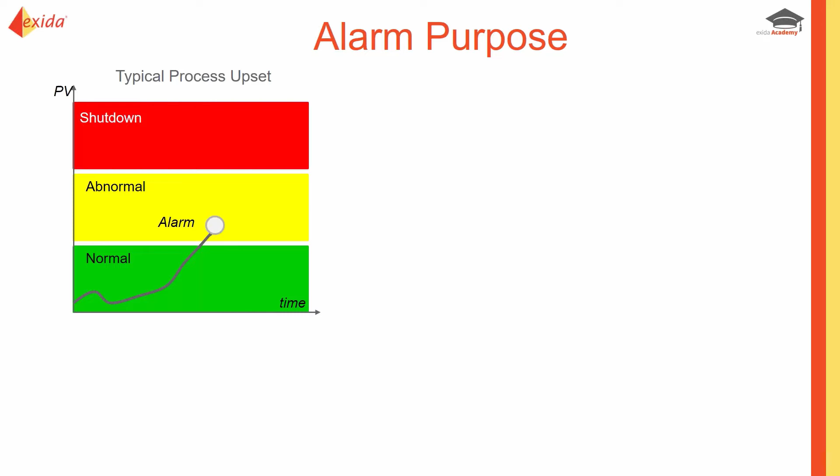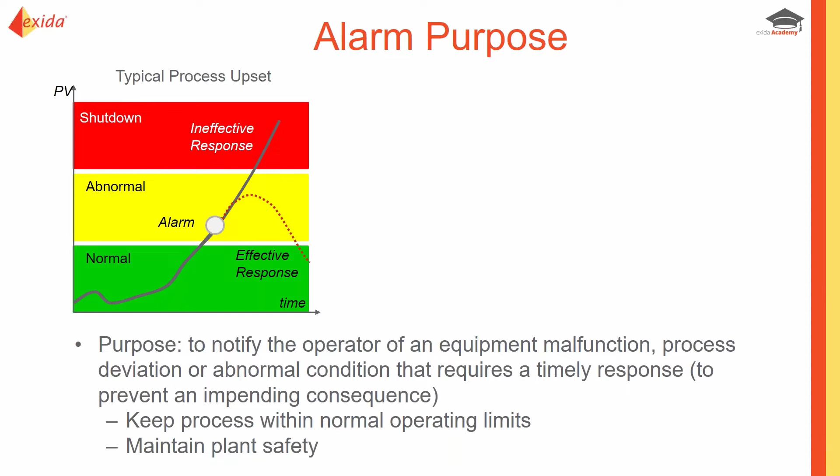So let's start with a reminder of what an alarm is supposed to be. In general, the DCS is typically able to control your process and keep it in the green zone, the normal operating zone, and that's what you want most of the time. However, when an excursion occurs and you go outside that realm into the abnormal situation area, that's when you want an alarm, a notification to the operator that something has happened requiring their attention and response. If the operator takes the appropriate response within the appropriate amount of time, the abnormal situation should correct and the alarm should clear. If the operator doesn't respond in time, the process will continue to escalate and deviate until we end up with a consequence or a shutdown.

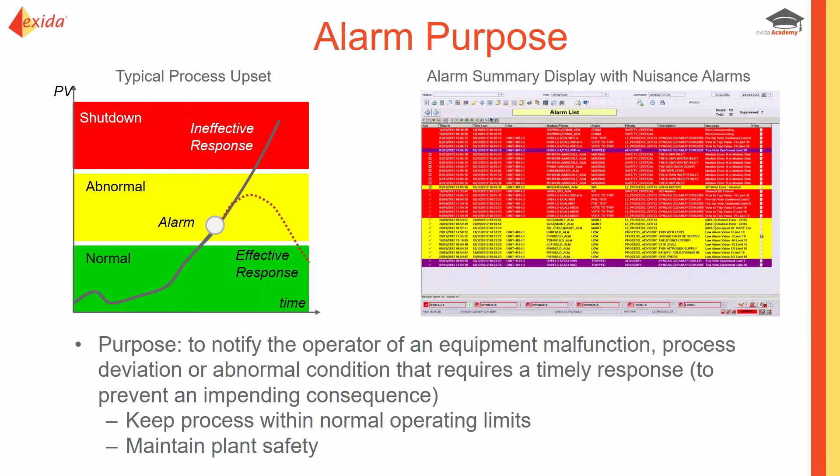So pretty straightforward on what an alarm is supposed to be used for. If you walk into a control room and see that the alarm summary display is full of alarms, then there's something wrong. That means the alarms we see are not following the principles we just talked about. In many cases, what we'll see is stale alarms, alarms that have been on the console for long periods of time. How can that be? Either no consequence has occurred, or the operator has responded and the alarm is not cleared. So it's an example of where the alarm as implemented is not following its purpose. It's very common to go into a control room and see nuisance alarms.

So first we want to talk a little bit more about nuisance alarms, because that's essentially the main reason for shelving to be used, is to be able to deal with alarms that are not functioning temporarily. A nuisance alarm by definition is an alarm that annunciates excessively, unnecessarily, or does not return to normal even after the operator takes the correct response.

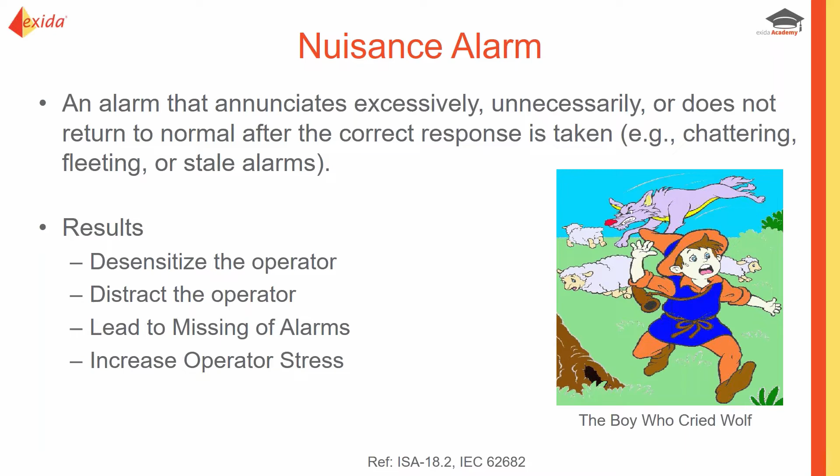That foreshadows the human factors point of view of nuisance alarms. If you implement a new alarm and train the operator on what they're supposed to do, the first time it occurs, it's likely the operator will respond appropriately. But if the alarm doesn't clear and remains on the console and no consequence occurs, that would be very confusing to the operator. The second time, they'll probably still respond as they're supposed to, but at some point they're going to stop responding because it's not making a difference. They probably feel their time and attention is better spent on other things, and that would seem correct if nothing happens after they respond appropriately. So we can see here the impact of having nuisance alarms.

Now there are a couple of different nuisance alarm types, different categories, and we want to go through them because that's relevant when we talk about shelving. The first type is called a chattering alarm.

This is an alarm that goes in and out with a high frequency and is only an alarm for a short period of time. You could find alarms that go in for 1 second and then clear, and a little bit later it's 2 seconds and then clears, almost not even enough time for the operator to acknowledge it. So obviously the alarm isn't clearing because of action the operator is taking, since they probably don't even have time to respond. That can be quite annoying, and if you have chattering alarms, chances are the alarm horn in your control room is turned off because it would drive the operators crazy.

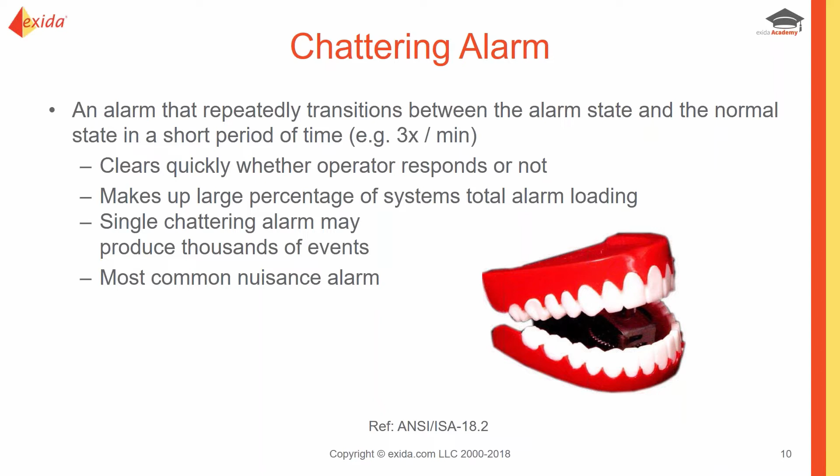Another type of nuisance alarm is a fleeting alarm, which is very similar to a chattering alarm, except it just does not repeat immediately. Another category of nuisance alarms is what we call bad actors.

These are the alarms that create the majority of the notifications in your system. You may have a control system with 10,000 alarms configured, but there are likely 10 to 20 of them that create 50 to 80% of all the notifications. That can be a tremendous annoyance factor to the operator, and those could be chattering alarms that result in bad actors, but it can also come from problems with hardware, failures, and things like that.

And that's one of the key things I want you to realize with nuisance alarms: it's not only a design problem where the alarm wasn't designed appropriately to begin with, but it could happen just from equipment failing, or being in the process of failing, where you end up with nuisance alarms.

And then the last category is called stale alarms. These are the alarms that are constantly displayed on the alarm summary display. So when you walk in the control room, if there's the same cast of characters of alarms that have been on the summary display for days, weeks, or months, or maybe even years in some cases, those are stale alarms.

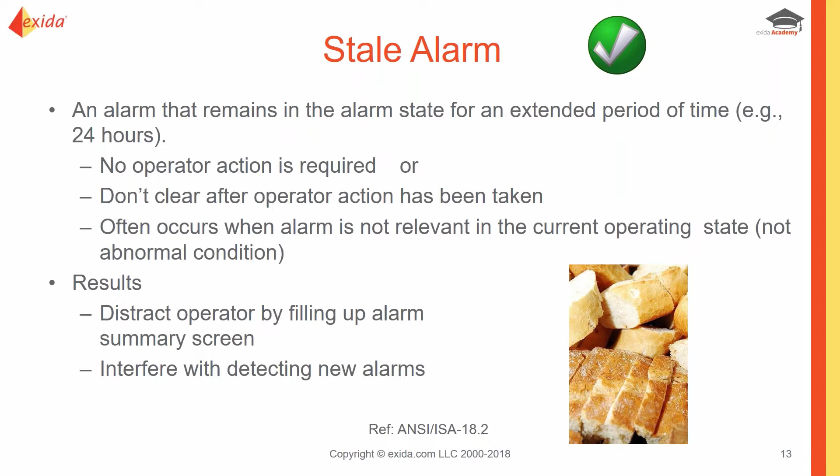Doesn't matter what the operator does, no matter what response they take, the alarm doesn't go away. So there's something wrong with that situation, and that can clog up the alarm summary display, making it hard for them to notice new alarms and process alarms during an upset. So it's very important to try to get rid of stale alarms as well.

So one of the downsides to nuisance alarms, let's talk about how that impacts the operator from a human factors point of view. The first way we'll look at it is from what's called situation awareness, which is the ability for the operator to take in what's going on right now and understand what that means in terms of how the process is working, where it's headed, and what will likely happen in the future related to the inputs they see at that point in time.

So they use their knowledge, their understanding of the process, the way things work together and interact. We'll call that the mental model, and they use that to really project out and understand what's happening.

Well, you can imagine if the cues that they are using to start that understanding process are suspect, false, or unreliable, that's really going to jeopardize their ability to truly understand what's going on with the process. It can lead them to incorrect conclusions, to a misunderstanding of how the process works and what different information and inputs mean, and it can lead to mistakes.

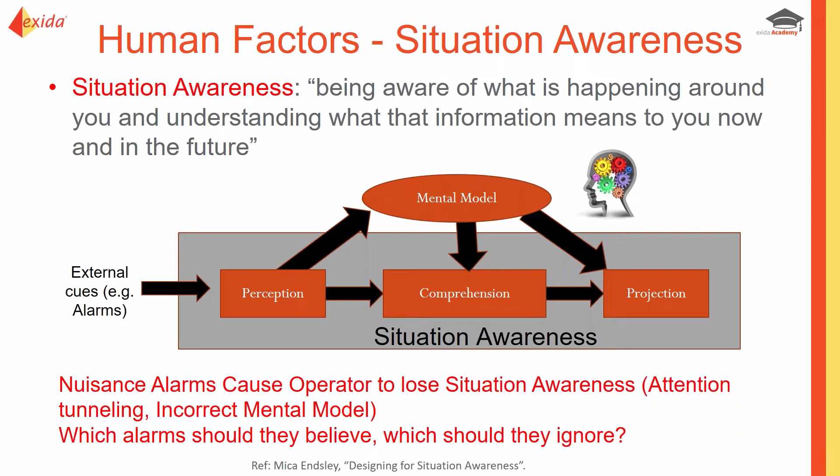It can lead to operators performing the wrong action because they were misled by spurious information. So nuisance alarms really can impact the operator greatly in terms of their understanding of what's happening in the process.

Now, what tends to happen if you have a lot of nuisance alarms is the operators develop this philosophy or understanding that they think it's okay to ignore alarms. And one might think, well, that's bad, that's dangerous. And of course, that is.

And ideally, we would not want operators to ignore nuisance alarms. But from a human behavior and human factors point of view, we need to understand what's happening. And what is happening is you have a person whose role is to take in hundreds of pieces of information and data and make quick decisions about what's happening and what they need to do. So they have a lot of information to process.

What a nuisance alarm represents to them is a piece of data that they do not have to worry about because they've seen in the past that it has not made a difference. So they ignore it so that they can focus on other areas that they believe are more important.

And actually, from an operations point of view, this would be exactly what you would want an operator to do, to focus on where their attention is really needed and where it makes a difference. And nuisance alarms are causing them to think that they don't need to worry about certain alarms. So really the only way to change this is to eliminate the nuisance alarms.

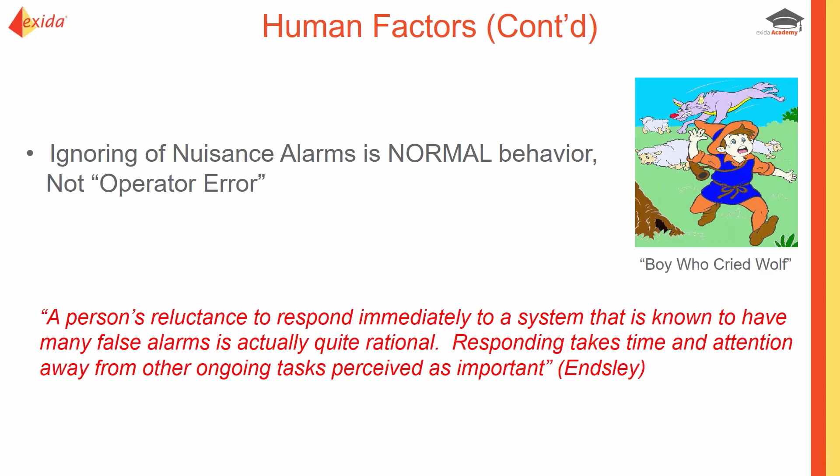Part of the process is to be able to remove the nuisance alarms temporarily from the operator's view, and that's the process called alarm shelving, which we'll get to in a second.

Now, again, thinking about the impact of nuisance alarms, if we want alarms to help us maintain plant safety and to act as an early layer of protection or a safeguard, then we are counting on the operator to reliably respond to alarms, or a particular alarm, when it occurs.

Well, this is pretty inconsistent with nuisance alarms when operators are not responding to alarms. So certainly, if the operator were to not respond to a safety alarm, the probability of failure is 100%. So if you've got operators not responding to alarms, you are jeopardizing the reliability of that layer of protection.

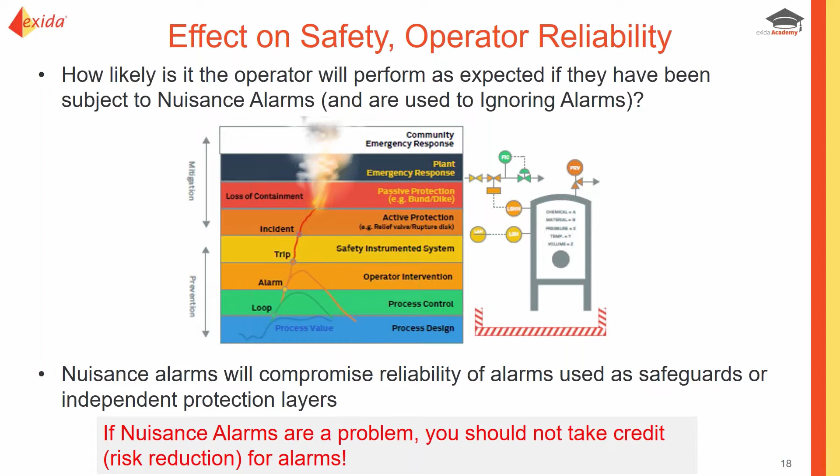And in general, we would recommend that you should not take credit for alarms if you have issues with nuisance alarms. So you should not take credit for alarms as safeguards or as independent protection layers. So that's the impact from a human factors and performance point of view.

So now let's talk about how we change things or deal with that. And that comes out of the international standards for alarm management, ISA 18.2 in the US and IEC 62682 internationally, defining what an alarm is supposed to be.

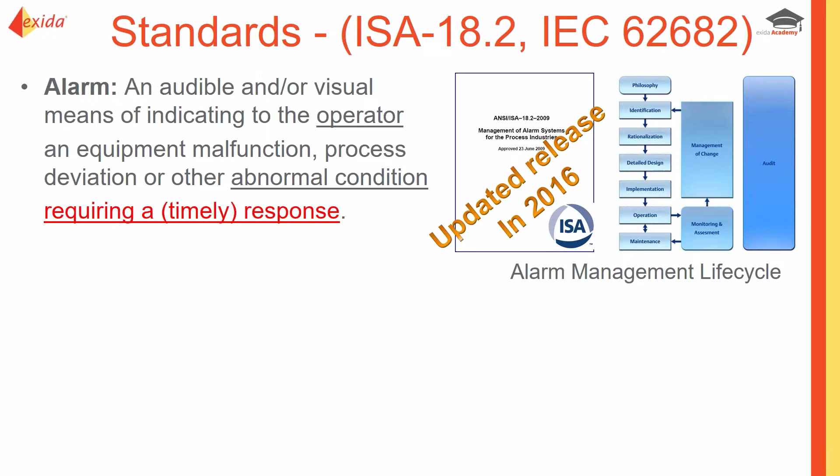But of course, that process does not happen immediately, and it doesn't happen necessarily right when the nuisance alarm occurs. So what we want to talk about is that intermediate process of what we can provide to the operator to help manage the nuisance alarm situation until it can be fixed.

Now, the standards also push and promote that nuisance alarms need to be taken care of very aggressively and addressed, defining some key performance indicators.

And of course, these KPIs are meant to drive behavior to improve the alarm system, eliminate nuisance alarms, and make the system more reliable. That's the whole idea of these KPIs.

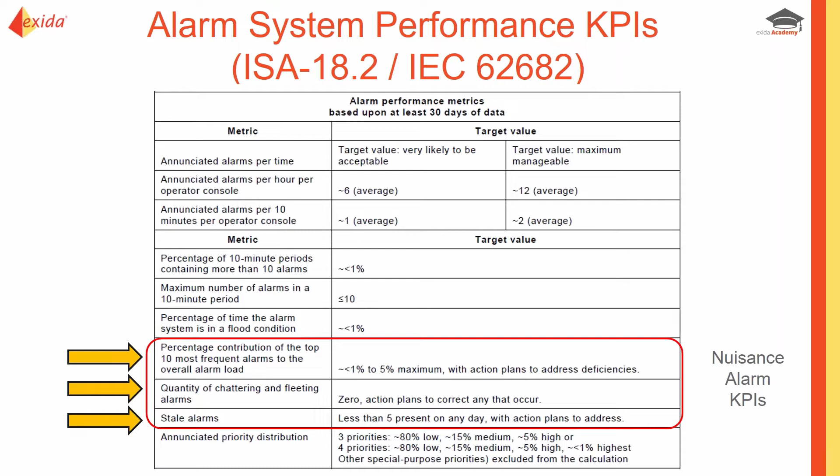The other thing the standards document talks about is a concept called suppression. This is where we get into, okay, when we get a nuisance alarm, what do we do? What can the operator do? There's a process downstream to investigate the problem, to determine whether it's a design problem, a hardware problem, or some kind of failure. But in the immediate time frame, we want to alleviate the operator's distress from the nuisance alarm and remove it from view. So that's where suppression comes in. The standards define three different forms of suppression, which is essentially hiding the alarm from the operator when the base alarm condition is present.

The first type of suppression is called designed suppression. That's where the control system does the automatic determination of whether an alarm should be presented or not, based on the status of the process, the state of certain equipment, or what recipe is running. So it knows all that, and then in a smart alarming way will suppress alarms if they're not relevant.

The second type of suppression is shelving, and that's the focus of this webinar. That is meant for operators to temporarily suppress an alarm, to remove it from their view, to go onto what's called an alarm shelf. So it's kind of like a snooze button for an operator.

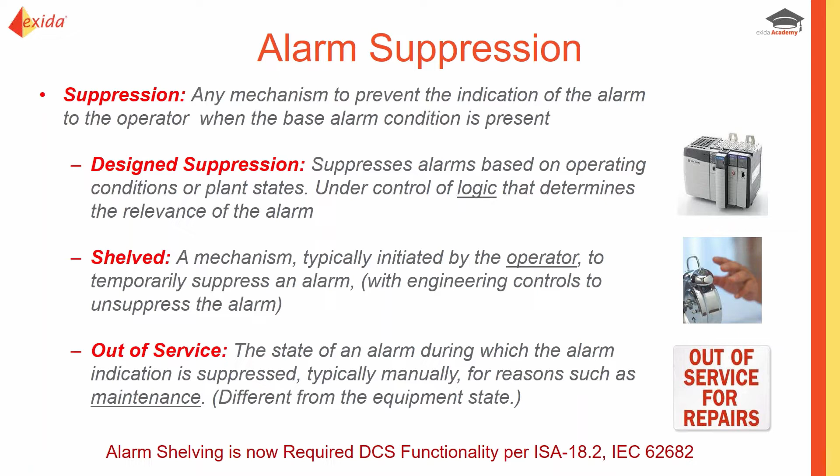So more about shelving in particular. The idea is, when a nuisance alarm appears and the operator knows at that point in time that the alarm is not valid or is only interrupting or distracting them, and they determine there's not a critical situation, then they can shelve or suppress the alarm, and that removes it from their view temporarily for a fixed period of time and puts it in a separate list of alarms. Now, this is different from disabling the alarm. If you disable the alarm, it's essentially gone forever unless you remember to re-enable it.

There are no lists of disabled alarm statuses really in a control system. You have many alarms that would be disabled just because there are so many alarms provided. So to be able to show a list of which of the potential alarms in the system are actually disabled would be a gigantic list, and it would be difficult to know which ones are newly disabled that shouldn't be, and which ones are disabled and were meant to be.

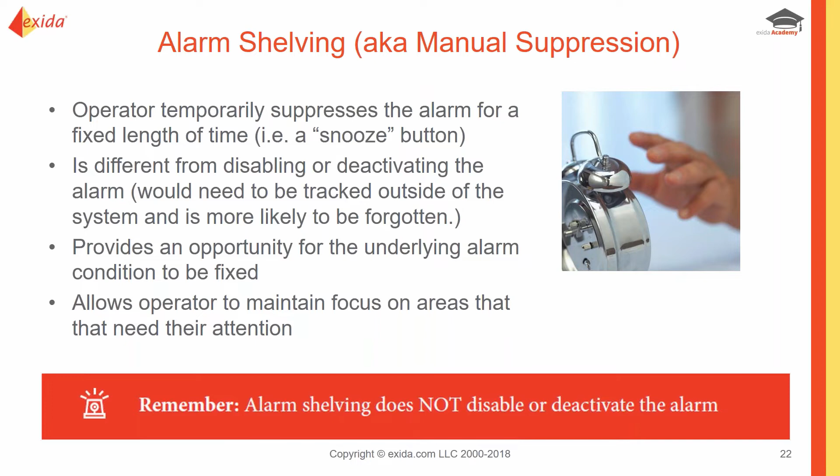So one of the key features of shelving is that the alarm, although it's out of the operator's view, that's only temporary, and the fact that it's shelved is displayed on a shelved alarm list. So it's gone but not forgotten, and it will come back after that period of time is up. And of course, the whole purpose of shelving is, let's get this nuisance alarm out of the operator's view so they don't have to deal with it and get frustrated and used to needing to ignore alarms. Remove it from their view so that then the resolution process can take place. The underlying condition, whether it's a design problem, a hardware problem, or a failure of some sort, can be addressed.

And that then allows the operator to maintain their focus on true problems and true areas that need their attention. Now, there are two different types of alarm shelving, and each type handles different types of nuisance alarms better, or is optimum for certain types of nuisance alarms. Now, some control systems provide both types of shelving, others provide just one. And if they provide just one, it's typically the continuous shelving.

So continuous shelving means once the alarm is shelved for a certain period of time, even if the alarm clears during that period of time, and if it comes back into alarm, it would immediately and automatically go back on the shelved list.

So there will be no action on the operator's part needed to reshelve the alarm. This is really good for chattering alarms, alarms that may go into alarm for a couple of seconds, because if the operator had to reshelve every single time the chattering alarm came in, that would be pretty pointless. So continuous shelving essentially suppresses the alarm for a fixed period of time, and it stays there whether the alarm is active or not during that time frame.

Now, the other type of shelving is called one-shot shelving. In this case, there's still a time estimate or time range for the alarm to be shelved, but if the alarm clears before that time elapses, then we rearm the alarm and put it back into the active array so it can be available if the situation triggers again. So if the alarm were to clear and then come back into alarm, it would actually be presented to the operator, and in this case it might be valid - that's part of why you might use this different type of shelving.

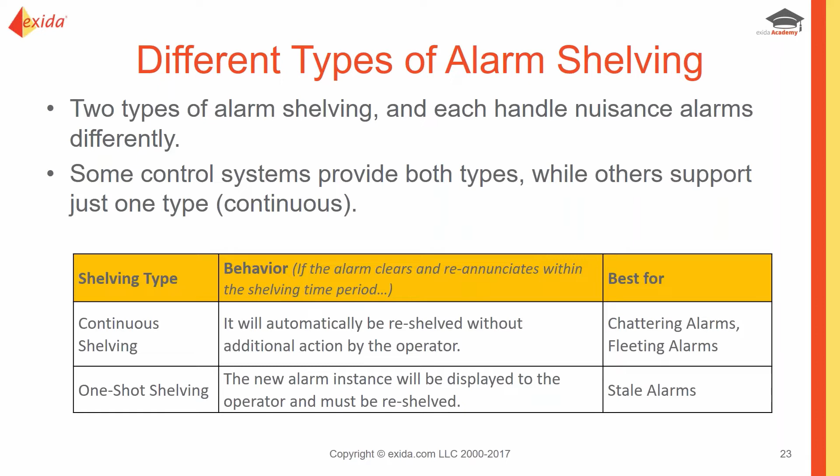So those are two different types of behavior related to what happens when the alarm clears and gets re-annunciated during the shelving period. So maybe you're thinking, okay, I'm interested in using shelving. I don't yet know what features are provided by the control system, but what are the things I need to talk about or figure out to make shelving work in my plant?

Alarm shelving is something you need to talk about in your alarm philosophy. That's new content as well, to make sure you're talking about how you're going to use shelving. It doesn't necessarily mean you must use shelving, but you must talk about the shelving capability now provided by the control system providers or suppliers. How are you going to take advantage of it, or how are you going to use that in your plant? You need to document that in your philosophy.

So what are the things to consider? One might want to look at what alarms can be shelved - that's the first thing to think about. Maybe not all alarms should be shelvable. Maybe the alarms that are the highest priority, or of a classification like safety alarm or safety critical, maybe those alarms shouldn't be able to be shelved. So you go through that thought process of which alarms can be shelved, and which can't.

Who can they be shelved by? Can an operator do it, or does it require a supervisor? Does it require some authorization? And how long should the alarms be able to be shelved for - an hour, a shift, a couple of days? Those are the kind of things to think about and define as part of your shelving process.

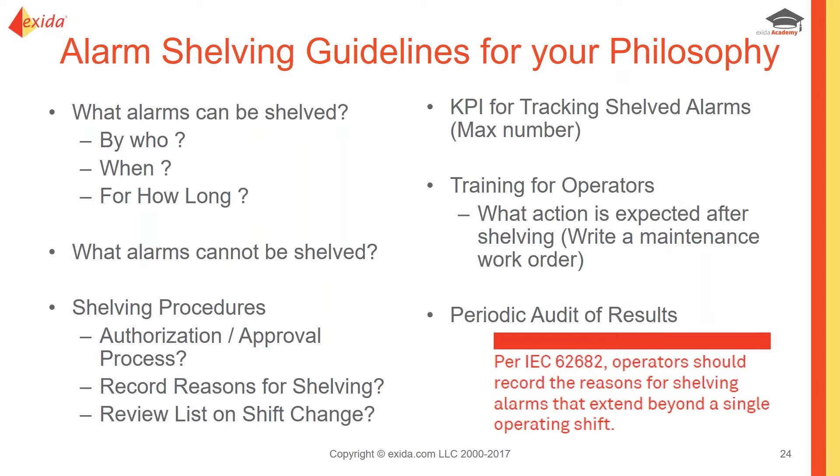So these are just some of the things you might want to think about to tailor shelving capability to your operation, and there's even more in the ebook. So those are ideas for what to include in your philosophy.

When it comes to being able to use shelving successfully, here are 5 best practices and recommendations. First, and probably the most important thing, is to train the operators on what the purpose of shelving is for. It's for helping to remove nuisance alarms from view. It's not a substitute for acknowledging alarms, and it's not a way to just quiet the alarm horn. There is a purpose for it, and if shelving is not used appropriately, you could have problems - you could have situations occur.

So it's a tool that can help the operator, but they need to use it appropriately.

Second, they should always be able to quickly and easily access the list of alarms that are shelved, so they can see which alarms are suppressed. They might want to look at that before they start up a new process area or piece of equipment, to make sure if something's been idle for a while there are no suppressed alarms on that equipment before they start it up.

So there are many good reasons why shelved alarm information should be readily accessible for the operator, and they should be reviewing it on a regular basis. In fact, that should be part of your shift handover process, where the operator on shift talks about what alarms are shelved or suppressed to the new operator coming on, and why they've been suppressed, as part of the handover.

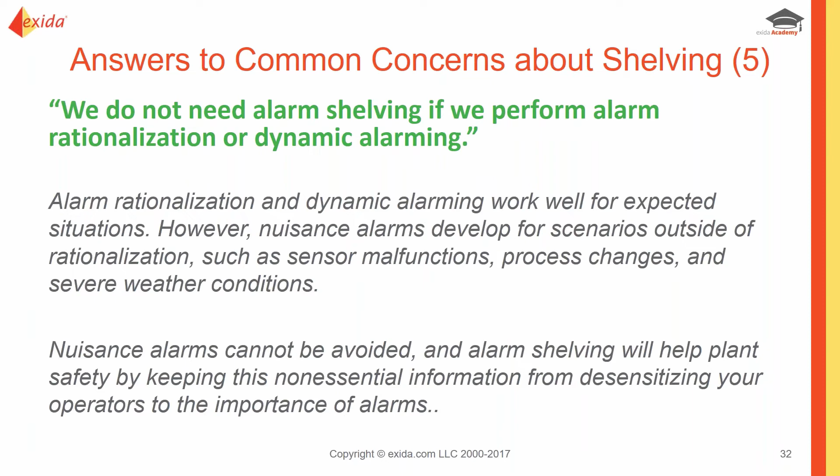So it's impossible to design to eliminate all nuisance alarms. You can certainly minimize the potential for nuisance alarms and minimize the number of alarms you get by doing a thorough and proper rationalization, and that's what you should do. But there will still be nuisance alarms that occur, and that's where alarm shelving still would be required or beneficial.

So now let's switch gears and talk about what the control systems are supposed to provide for alarm shelving. What are the requirements in the ISA and IEC standards when it comes to alarm shelving? First, from an overall point of view, as I mentioned earlier, the function or ability to shelve alarms is a required function from these standards.

In addition, there needs to be a way to display the list of alarms that are shelved, and provide some time limit or timeout for the alarms to only be shelved temporarily. There should also be records for when alarms are shelved, and as a best practice or recommendation, the control system should have some methodology so that when a bunch of alarms are unshelved or unsuppressed, that doesn't result in a flood of alarms. So those are some of the key requirements for overall alarm shelving functionality.

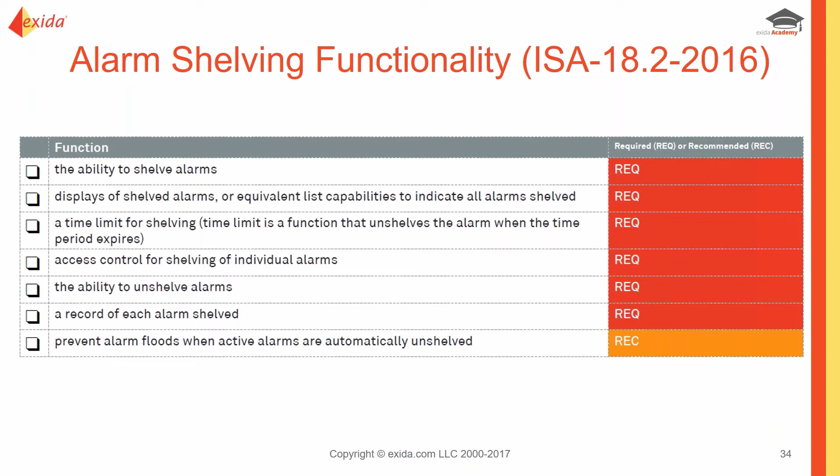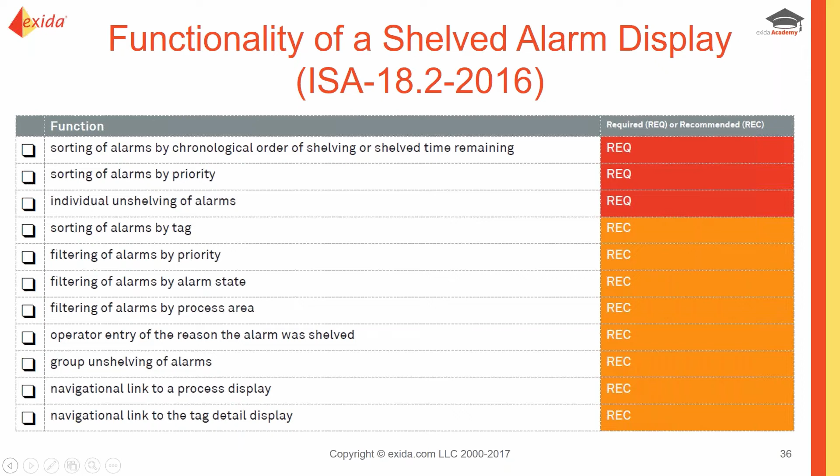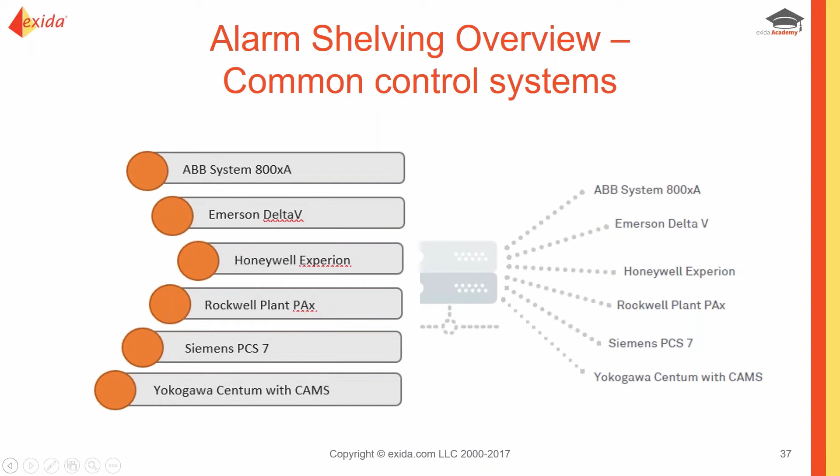So now let's talk about, at a higher level, what is the alarm shelving implementation in some common control systems. And for this, we've looked at 6 different control systems that we've had the pleasure of doing various projects on. So we've developed a good expertise as to how they work and recommend to people on how they should leverage alarm shelving for these different platforms.

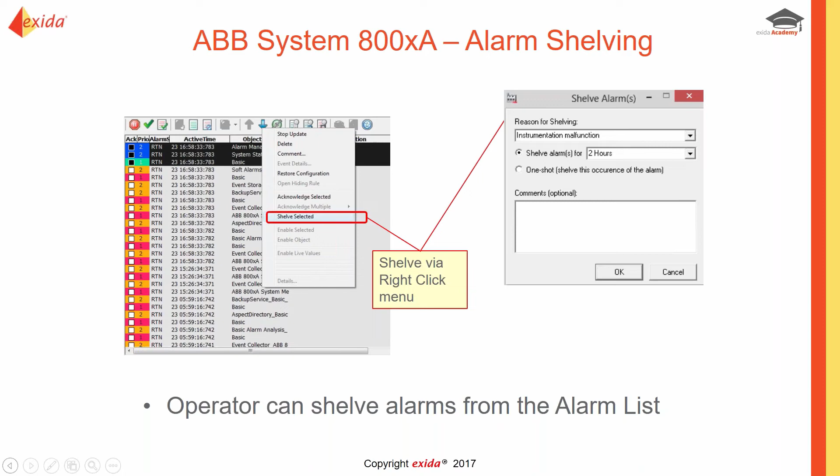So the first one is ABB System 800XA. And for their implementation, shelved alarms or alarms can be shelved from the standard alarm summary display via right click, and that will call up a dialog box from which the operator has several choices related to shelving. The first thing is they get to choose what is the reason for shelving the alarm, and that choice comes from a predefined list that is set up in engineering mode. So they can choose the predefined reason.

That's the first step. The second step is to determine how long they want the alarm to be shelved for. And in this case, again, it's a predefined list of times to choose from. That could be either fixed duration or actually could be infinity, meaning there is no time limit. So the operator has the ability then to set the time they want the alarm to be suppressed for.

And then they also have a choice of whether they want that particular alarm to be shelved using a continuous shelving or one-shot shelving. And as we talked about, each of those has kind of a different ideal application. Continuous shelving for chattering alarms and most alarms in general, and one-shot shelving for stale alarms. So depending upon what's happening, the operator can choose the time duration and the type of shelving.

They can also enter a comment, a free-form comment, so that can be built into the dialogue to kind of force them to do that. And that's available for them to add additional information as to why they've shelved the alarm.

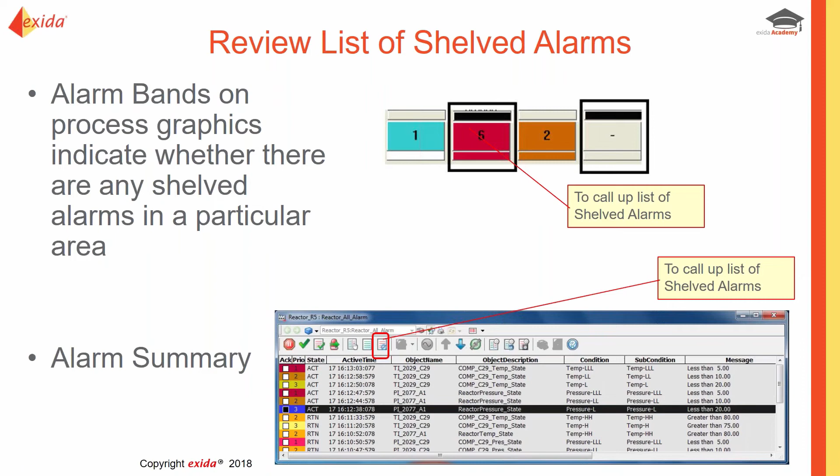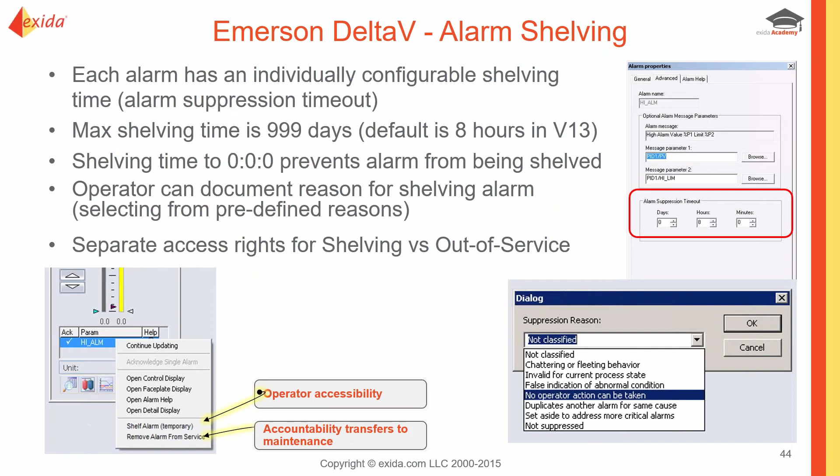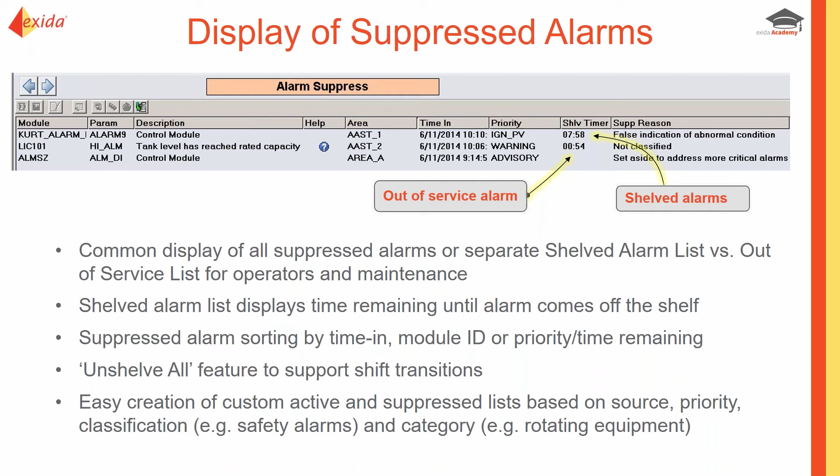This has the flexibility to configure so that you have separate displays for shelved alarms versus out of service, if that's a better way to view things. And then you can even go further with shelved alarm lists based on certain categories of alarms - either the highest priority alarms, or maybe alarms of a certain classification, like safety alarms or environmentally critical alarms. You could set up a display that shows any alarms with that classification that are shelved, because that would be very important to know - if a safety alarm is being shelved, then it's essentially like you're bypassing a safety function almost. So a lot of capabilities there.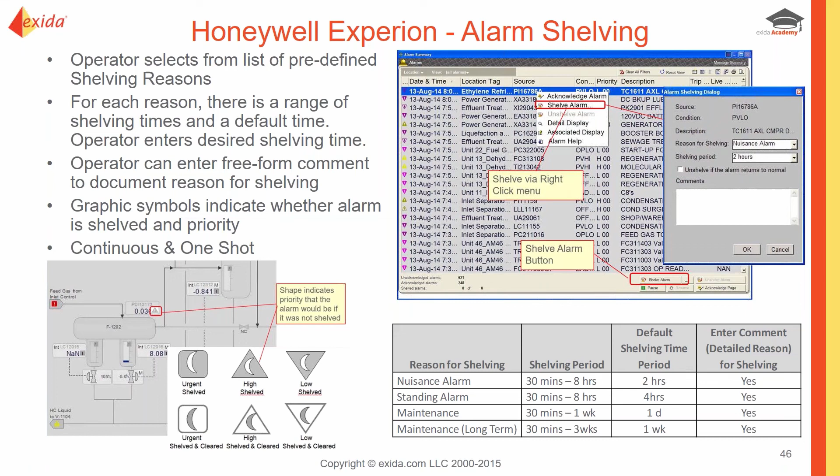One of the strengths of this system is the ability to display within the process graphics the status of shelved alarms. So if you look at a process screen, instead of showing an active alarm being colored, you'll see a symbol that tells you there is a shelved alarm present for that tag. It also helps differentiate what the priority of that alarm would be. So you can look at a screen and not only know what alarms are active, but also know that there are some alarms that are actually suppressed at that point in time.

For the Rockwell PlantPAx system, alarm shelving can be enabled or disabled on an alarm by alarm basis, so quite good control over what alarms can be shelved and which ones cannot. In addition to enabling or disabling, you can also set the maximum shelving time separately for each alarm. 8 hours is the default, but you could set that for 8 hours, 24 hours, whatever.

The idea is when the operator goes to suppress or shelve that alarm, they have the ability to set the shelving time anywhere they want between 0 and up to that maximum. They can also enter a free-form comment to document why they shelved the alarm. Similar to what we just talked about, a symbol on a process graphic, if an alarm is active and shelved, there'll be some indication of that status provided within the symbol.

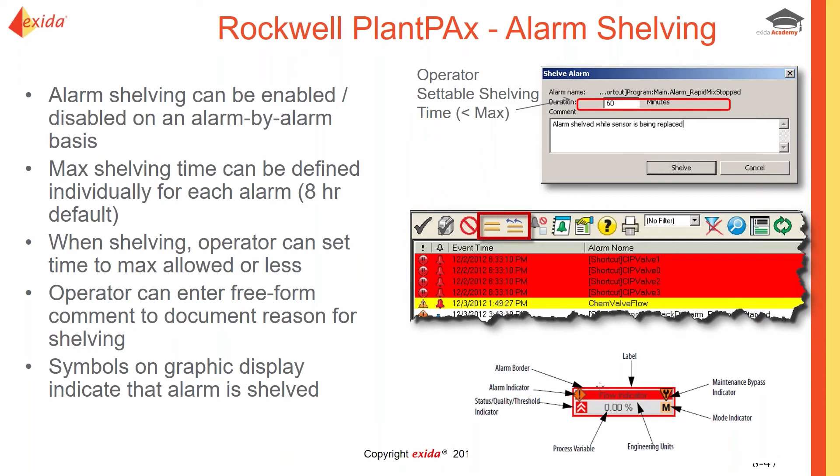Now, for the Siemens system, they have two different shelved alarm displays. One is of alarms that are shelved but not actually active at that point in time, so the alarm is not on, but it's suppressed. Those are called the list of messages to be hidden. Then there's a separate list, which is alarms that are active and are shelved, and that's the hidden messages list.

Again, it helps you to understand whether the alarm is actually active or not, and in that case, if you were to unshelve the alarm, what would happen? Would you now have an active alarm situation, or is the alarm actually cleared and it goes back to normal? Similar to the other systems we looked at, when an alarm is shelved in a PCS7 system, the operator can enter an optional comment.

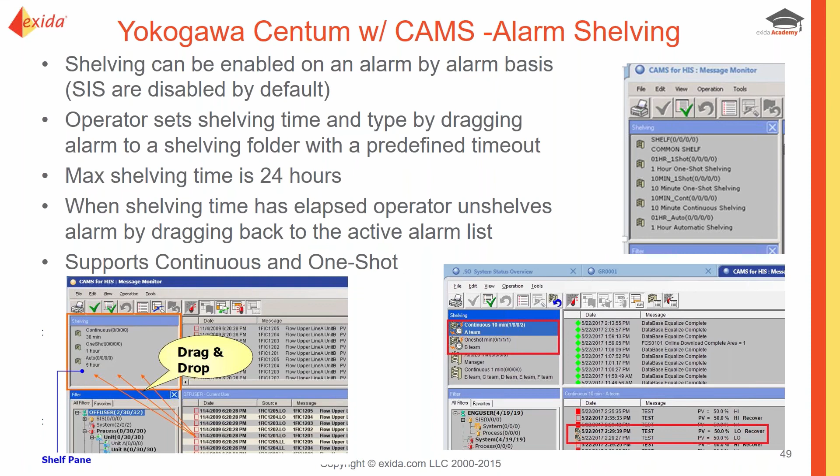When the alarm times out and it's time to be unshelved, there's visual indication provided, and then the operator needs to go and grab the alarm and essentially drag it back to the active alarm list to clear the suppressed alarm. So that's the overview of alarm shelving implementation. You can see there's a lot of good and very useful functionality to take advantage of. You can also see that all those suppliers implemented functionality a little bit differently.

So one of the recommendations is, before you create your philosophy to define how you want to do shelving, make sure you do some research to understand how your control system supports it, so that the requirements that you specify can be implemented in the control system.

In summary, I truly believe that alarm shelving is a very critical tool for the operator to help them deal temporarily with nuisance alarms. I'm not the only person that feels this way, because that's why the standards bodies put that as a required function. Certainly, if you don't use alarm shelving and you have nuisance alarms, then operators are going to become desensitized to alarms in general. That will increase stress tremendously.

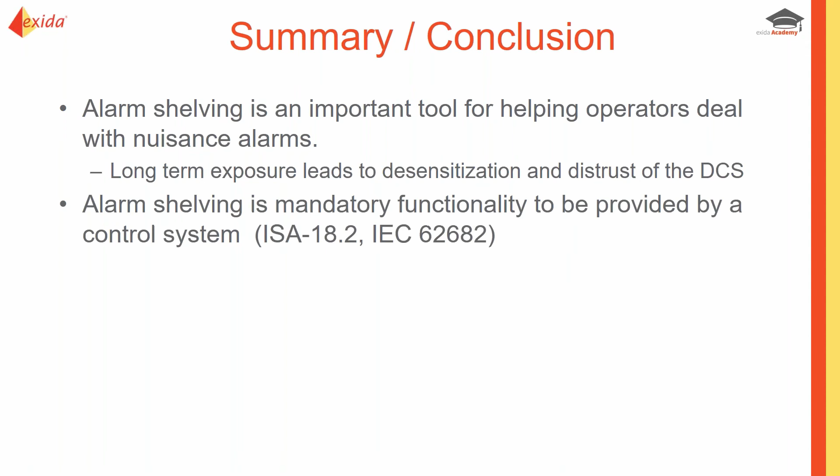It can cause them to distrust the control system. So using alarm shelving to alleviate the nuisance alarm problems temporarily until they can get fixed is a pretty powerful functionality. As I mentioned, it is required functionality from the standards.

So to summarize, what I would recommend is, if you have a control system and you're looking at implementing shelving, download a copy of the ebook, and review the capability that your control system supplier provides. Some of it might be of recent vintage, so you may not be aware of what's available. Based on what's available, think about what makes most sense operationally in terms of leveraging shelving, then implement it and put it into your alarm philosophy the way you want. It'll provide a mechanism for dealing with nuisance alarms. Make sure you include the necessary checks and balances so that shelving is used correctly and not abused.

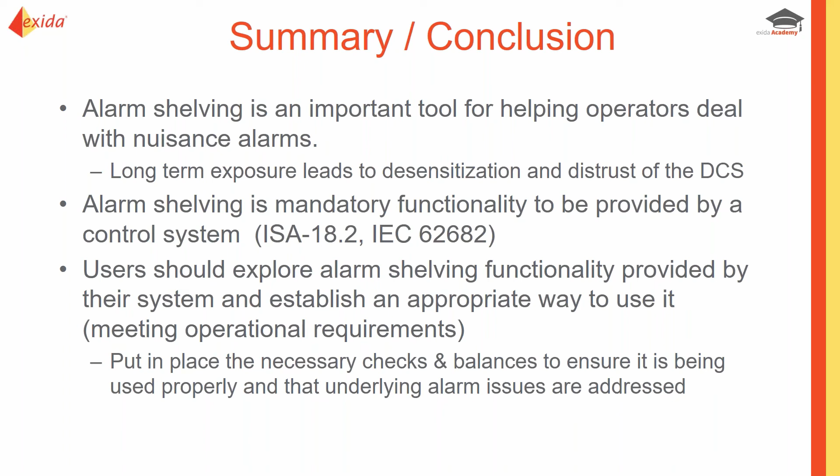Because certainly one could just continue to reshelve an alarm rather than actually fix the underlying problem, and that's not what we want to have happen. That's not what shelving is meant for. But without some review and oversight to make sure it's being used properly, that could happen. It could also happen that the underlying issues causing the nuisance alarms aren't being corrected or fixed, and that needs to be part of the process as well.